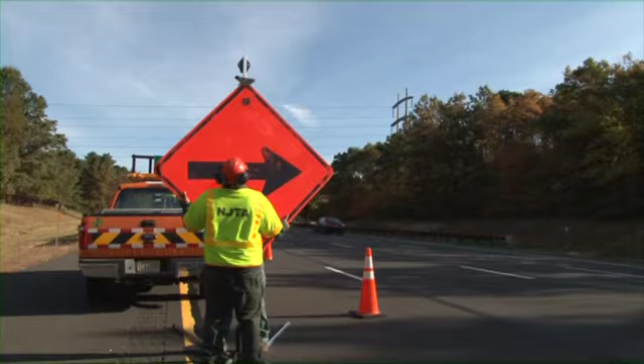It takes a colossal effort to keep one of the busiest roads in the country operational without putting anyone in harm's way. This is why the New Jersey Turnpike Authority has created an aggressive safety program aimed at keeping you and the traveling public safe. You will be required to understand and adhere to all of the requirements to perform your tasks in as safe a manner as possible. The New Jersey Turnpike Authority is comprised of several different organizations that all work together.

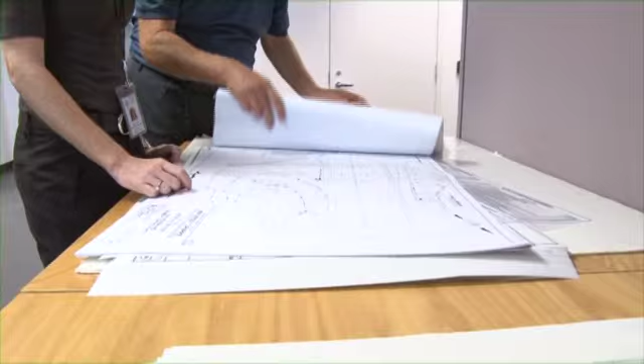The Engineering Department supervises and controls design, construction, and rehabilitation, as well as ensures the engineering standards are upheld throughout construction. The Maintenance Department is responsible for maintaining the assets of the authority, including the bridges and roadways, and they perform and manage all repairs and improvements.

The Operations Department is responsible for traffic engineering and regulations, emergency services, and coordination of roadway activities, as well as operation of the Traffic Management Center. They ensure that everything is operated with the safety of all motorists and workers first and foremost. The Operations Department is also responsible for the approval of all closings on authority roadways.

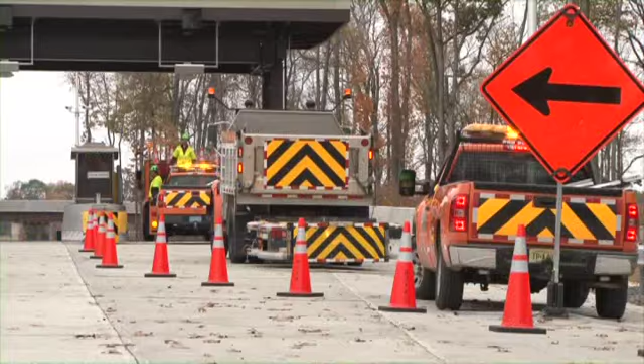The Tolls Department collects all of the tolls on the Turnpike and Parkway. Work zones in the vicinity of the toll plazas need to be coordinated with this department. Finally, the State Police, specifically Troop D, works with the authority to provide assistance with lane closings, vehicle escorts, and slowdowns. The Construction Unit Patrol specializes in temporary traffic control. Their primary duty while on site is to help you work safely.

Permits and approvals. Before any work can be done, you must ensure the correct paperwork is in place. This means proper permits and insurance for you and your company. Remember, traffic permits require 10 business days for review and approval from the authority, so if you do not have them, you are not working today. Failure to update the traffic permit as required will result in the suspension of the permit and denial of closure requests until the information is received.

All applicants for traffic permits will be required to view a training video regarding safe operations on authority roadways and must read and understand the Manual for Traffic Control in Work Zones. A TCC, or Traffic Control Coordinator, certified by Rutgers CAIT LTAP, may be required depending on the scope of the project. This person is to have no other duties for the project and is to remain on site at all times. The TCC is responsible for making sure all MPT is in place and working properly.

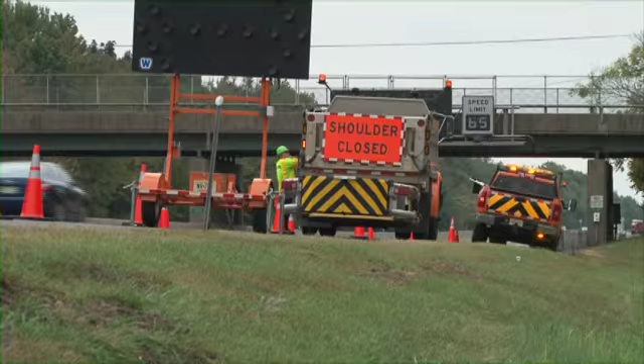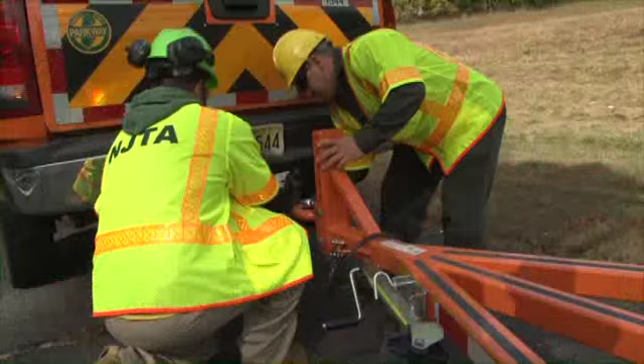Personnel and personal safety. Once on site, you must be sure to have proper personal protection equipment, or PPE. The New Jersey Turnpike Authority has high visibility safety apparel requirements that are above the minimum federal requirements. All workers that are exposed to traffic must wear a Class 3 ANSI reflective vest with sleeves. Tearaway sleeves are acceptable, and you should wear a hard hat and have proper foot protection when in a work zone. In addition, all vehicles should have overhead 360-degree visibility amber lights. Compliance with these OSHA regulations will reduce your exposure to hazards while on the job site.

Closure requests. The policy of the authority is to limit lane and shoulder closures to the minimum required to perform the necessary work in a safe and timely manner. Lane closures are only to be permitted when it enables work that would not be feasible or efficient otherwise. Only the Operations Department may approve the scheduling of a lane, shoulder, ramp, or roadway closure.

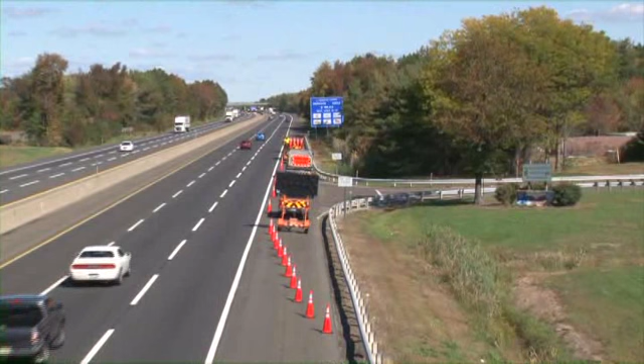Available times and dates for closure requests can be found in the lane closing and shoulder closing tables in the Manual for Traffic Control in Work Zones. These tables provide the minimum number of lanes that must be maintained for segments of the roadways on an hourly basis. Additionally, there may be some restrictions that apply to your specific closure, such as heavy travel days, special events, and weather issues. Check with the Operations Department about such restrictions, as they must approve any exceptions you may have.

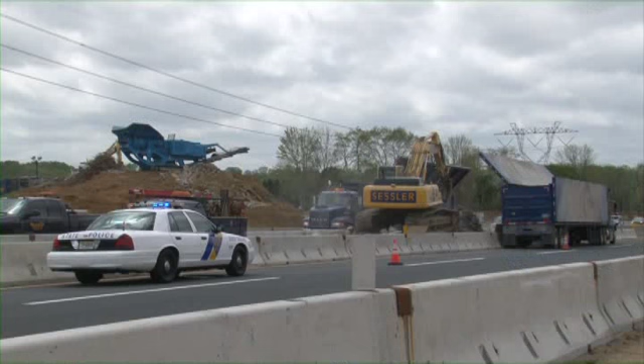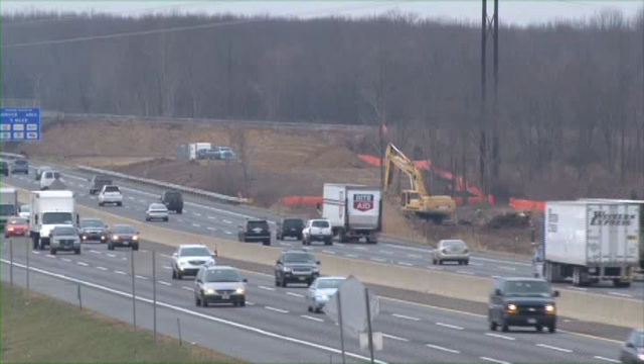Terminology. While working on the roadways and communicating with the state police and other groups, knowledge of the proper terminology and roadway designations are important. All designations on the turnpike are noted as from-to. For example, a roadway going from north to south would be abbreviated NS. Familiarize yourself with these abbreviations so that everybody can more easily communicate.

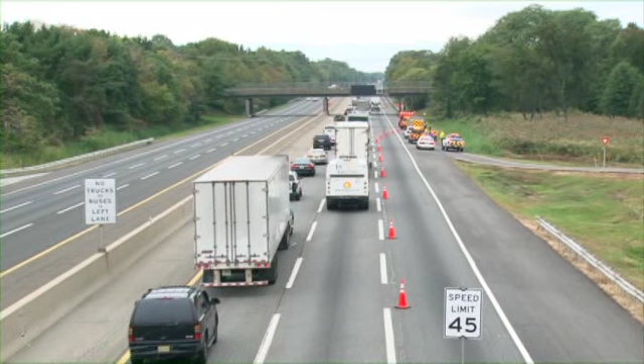Closures. There are several different types of closures that you could work on, each with their own specifications and restrictions. Lane closures refer to mainline roadways and are the most heavily traveled section that would need to be closed.

Short-term lane closures should only occur on the left or right side of the highway. The installation or removal of any type of lane closure on the turnpike needs to be performed with the assistance of the state police using a traffic slowdown. Lane closures on the parkway do not require the use of a slowdown.

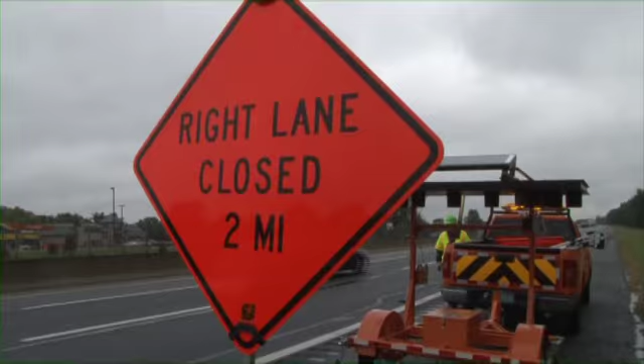To begin a lane closure, proper signage must first be put up to alert traffic of the approaching work zone. Both sides of the roadway must be signed before work can begin. Speed reductions are to be posted in advance of and through a work zone and are to be set at 45 miles per hour unless otherwise noted.

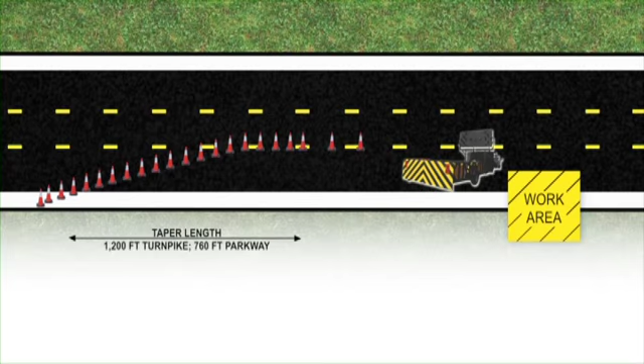Then, with the use of a turnpike-approved cone truck backed up by an attenuator, the cone taper can be set up. The taper on the turnpike is 1,200 feet long, measured from the first cone of the taper, and 760 feet on the parkway. The cones must be placed down 50 feet apart on the turnpike and 20 feet apart on the parkway within the taper.

An arrow board must then be placed in its proper location 900 feet from the first cone located within the taper on the turnpike and 760 feet from the first cone at the end of the taper on the parkway.

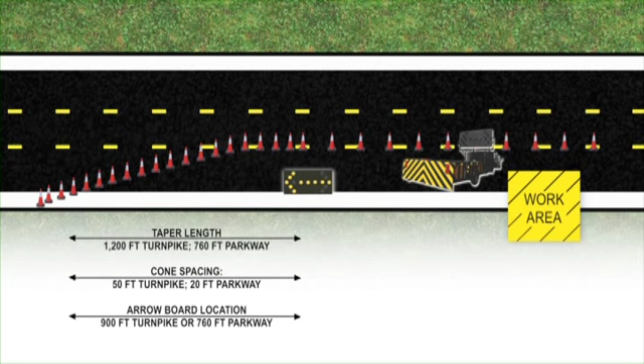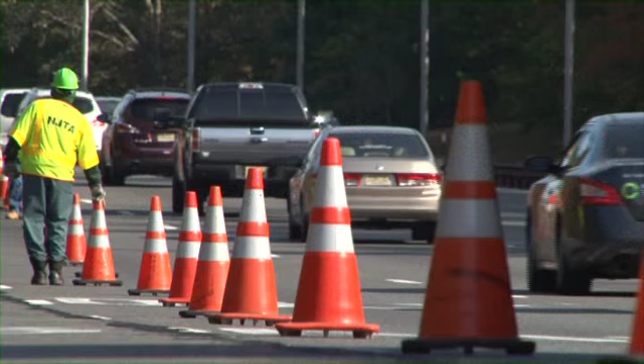When multiple lanes are closed in a work zone, they need to always be adjacent on the same side of the highway and will require a minimum of a 1,000-foot tangent section, depending on sight lines and approved taper points, followed by 1,200 feet of taper on the turnpike and 760 feet of taper on the parkway. Spacing of cones on the non-tapered section is 75 feet on the turnpike and 80 feet on the parkway.

After work is completed, all cones must then be picked up. On the turnpike, a slowdown must be initiated by the state police before the pickup of the taper can begin. The cone truck shall travel in reverse, always on the inside of the taper, picking up the cones. Never leave a lane closed during inclement weather.

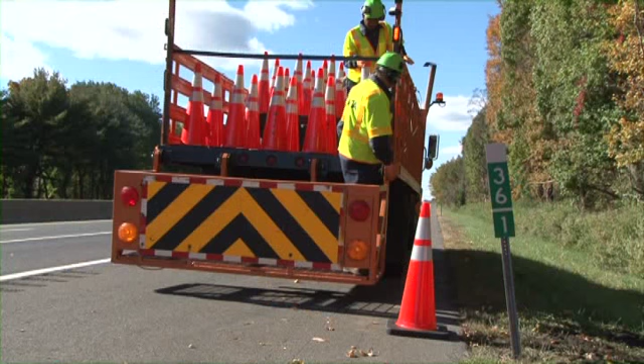Work areas within the clear zone, typically 30 feet, of an authority roadway require a shoulder closure unless protected by guide rail or temporary construction barrier. The installation or removal of any type of shoulder closure may be performed without a traffic slowdown and without the assistance of the state police.

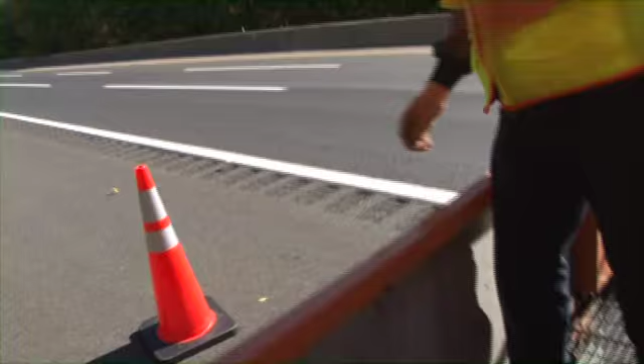Remember, with or without the support provided by the state police, it is still your responsibility to close or reopen lanes and shoulders in a safe manner for workers and the traveling public. Closures at toll plazas will require state police assistance unless otherwise advised by the Operations Department.

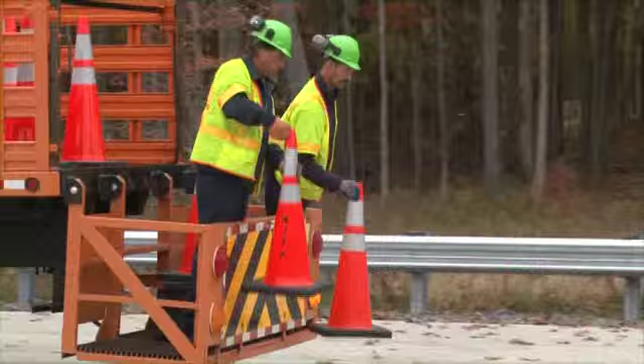Before work begins, the lane use signal above the lane must be changed to indicate that the lane is closed. Closure of toll plaza lanes may extend before or after the toll plaza or may be confined to the limits of the toll plaza, depending on the type of work being performed. Interior toll plaza lanes may be closed while maintaining traffic through the toll plaza on either side. Unless otherwise shown in the plans, the standards for toll plaza closures are the same as for other lane closures.

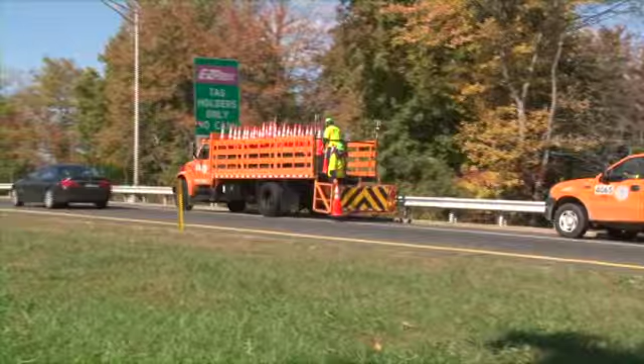Closures on ramps that do not extend onto the main line will follow their own set of guidelines. For short-term ramp closures, the Operations Department will issue the permissible closure hours. Full ramp closures will typically require detours. You will be responsible for coordinating with the authority and any other affected agency in developing any required detour plan or traffic mitigation requirement.

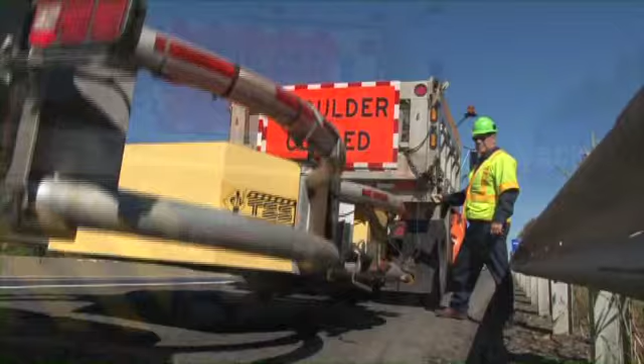Short-duration shoulder closures may be used instead of standard shoulder closures only when and where authorized by the Director of Operations. Roadway closures are provided on a limited basis for contract work and noted in the contract plans and specifications, and are otherwise rarely permitted. The Operations Department will advise you when work may be performed within a full roadway closure.

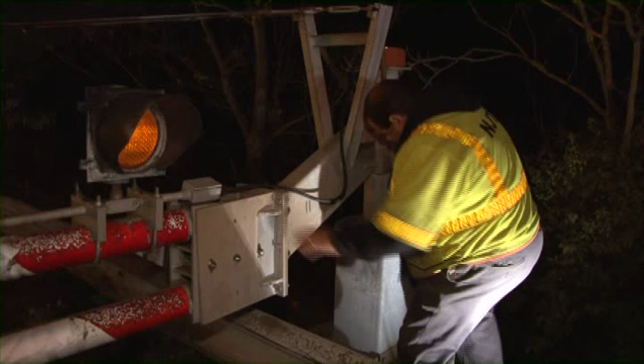Once a roadway is closed, the gate is to remain locked, and the roadway can only be reopened by the State Police or the Operations Department. When working within a closed roadway, work vehicles may travel in both directions as long as you stay to the far right in the direction you are heading. Headlights and 360-degree visibility lights must be on at all times.

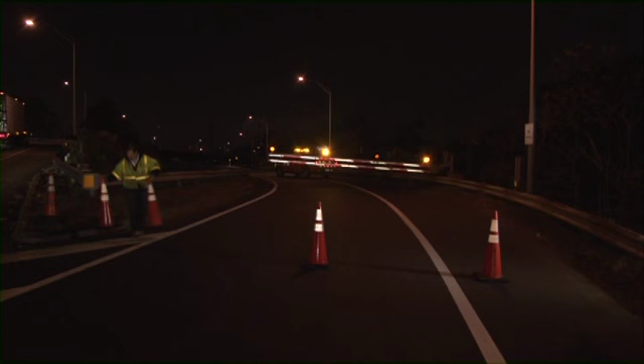The maximum speed limit on a closed roadway is 35 miles per hour, and all access to the site must be from an interchange unless approved by the Operations Department or State Police. U-turns cannot be used to access a closed road.

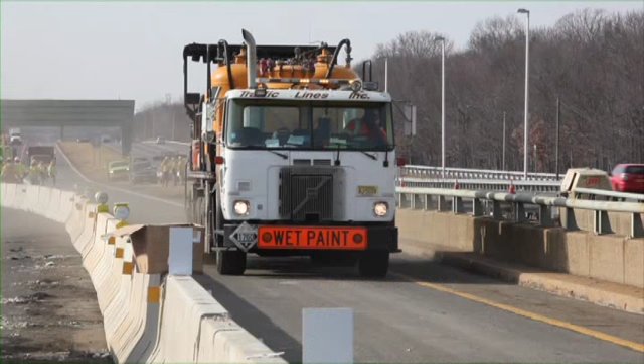Sometimes lane shifts will be required to keep traffic moving safely away from a work zone. Note that a lane shift is not a lane closure. Some lane shifts may require the removal of existing striping, and temporary pavement markings will be needed to indicate that traffic must temporarily follow a different path from the usual lanes. Tapers are 100-to-1 on the approach and 70-to-1 on the return, unless otherwise noted.

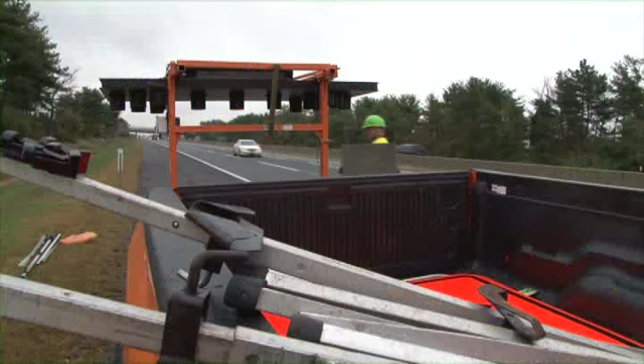Temporary traffic control devices. In order to safely close any lanes or shoulders, temporary traffic control devices will need to be installed and maintained. Temporary work zone signs will need to be placed as depicted in the plans or standard drawings to maintain the safe and efficient flow of traffic through the work zone.

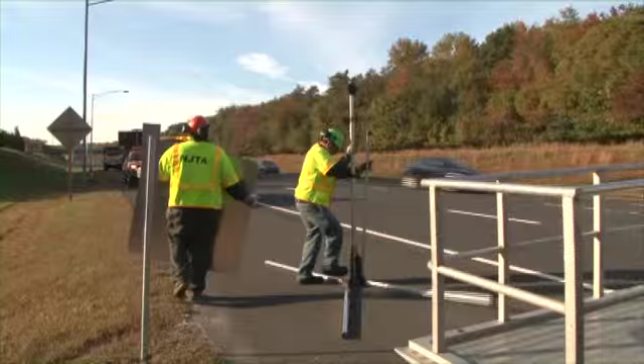All temporary signs need to be on folding, barrier-mounted or guide rail-mounted stands and must meet the standards described in the authority documents. Portable variable message signs are used to alert traffic of upcoming work zones and closures. These signs shall be compatible with the software used by the statewide Traffic Management Center so that they can be monitored and controlled. Access procedures to these boards shall be provided to the Operations Department 2 weeks prior to their activation.

Vehicle-mounted arrow boards used with truck-mounted attenuators need to be activated to point in the appropriate direction that traffic must shift to pass the vehicle on the parkway.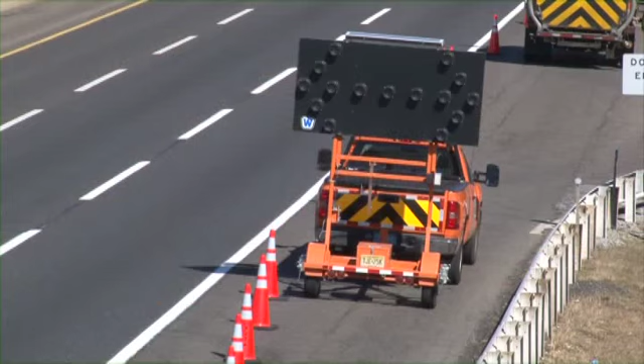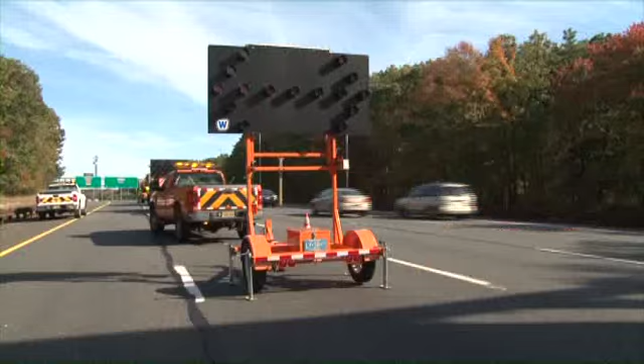On the turnpike, the arrow board attached to the vehicle will be in caution mode straight bar. Work zone arrow boards that are not vehicle-mounted must be located either behind barrier or guide rail or within an approved lane or shoulder closure. Trailer-mounted arrow boards must not be hitched to a vehicle while in position for the duration of the closure.

Traffic cones are used to channel the traffic away from the work zone and are typically placed on the closed side of the dashed or solid traffic line. These cones must always be reflective orange and outline the safe work zone, and no encroachment whatsoever will be permitted into the adjacent open travel lane.

There are 28-inch cones and 36-inch cones that may be used. If using the 28-inch cones on the turnpike, a 5-pound collar must be placed on each one to ensure that the wind doesn't lift them up. All cones must be uniform on a work site. Never mix and match different sizes of cones.

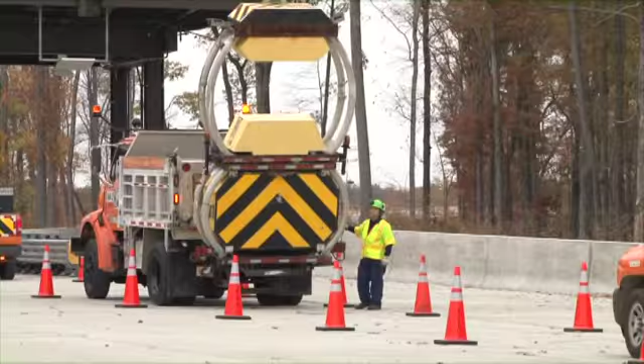A truck-mounted attenuator, or TMA, is a system that is installed on the back of the traffic control truck and is the rearmost vehicle in a mobile lane closure or other truck in advance of a lane or shoulder closure and provides safety for the workers on site. This TMA is 22,000 pounds and should be set up before the beginning of a work zone as specified by the authority documents. No work can be done on either roadway without a proper TMA in place.

Working during the night can pose some additional safety concerns, so extra regulations must be followed. Signs, cones, and other traffic control devices should have sufficient retroreflectorization to be seen at night, and all work vehicles must have 360-degree visibility lights. All work activities must be adequately illuminated, and the lights need to be positioned so as not to be directed into oncoming traffic. Work zone lights are not a substitute for any warning lights.

Worksite access. When entering or leaving a work area, appropriate caution must be used. Anytime you enter or exit a job site, ensure that there is a sufficient gap in traffic to allow for the intended move. It is also important to understand that under no circumstance are you allowed to enter or cross an active roadway, and you can only enter or leave the work site in an appropriate work vehicle.

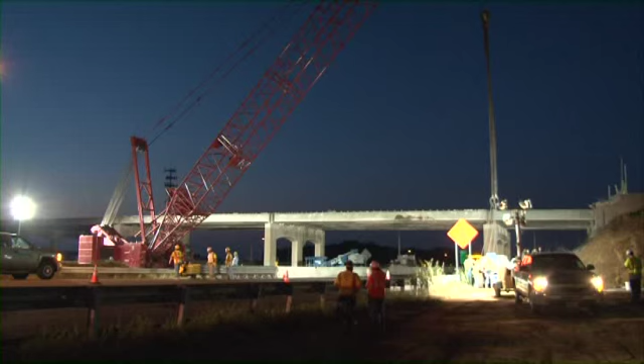Maintaining temporary traffic control zones. Lane, ramp, and partial ramp closures require a full-time patrol unless otherwise determined by the operations department. Patrol vehicles are considered work area vehicles and must follow all restrictions as such. When patrolling lane closures, the patrol must work from within the work zone and obey a speed limit of 35 miles per hour. If traffic cones are knocked down on the taper section of the turnpike, a slowdown must be requested in order to go out and set them back up again. The TCC and resident engineer will be responsible for maintaining the traffic control throughout the work zone.

Special provisions. While working on the parkway, the use of U-turns is generally prohibited, although may be allowed depending on the contract. Use of grade-separated U-turns may also be allowed on the turnpike depending on the contract. At-grade U-turns are prohibited on the turnpike as well as all U-turns at toll plazas. Z-turn usage is never allowed under any circumstance. If you need to get back onto an active roadway, you need to safely exit the work zone, get off at the next interchange, and then properly re-enter the highway.

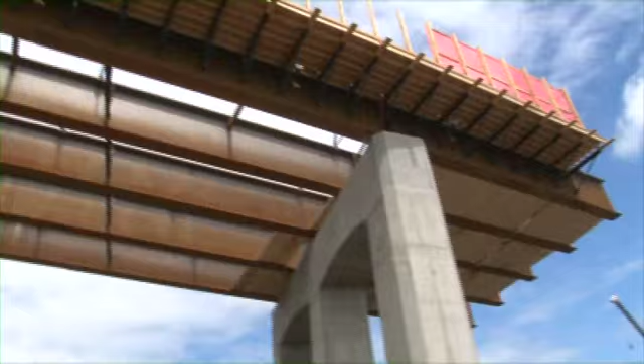Communications. When necessary, lane closings may need to be coordinated with other agencies. If work zones fall outside of authority jurisdiction, you must comply with regulations applicable to those areas. The Traffic Management and Technology Center is the focal point for all communications and disseminating of information to all parties, both internal and outside agencies.

Named after John A. Cifelli, the former director of maintenance, this building is also where they monitor and report congestion incidents. Traffic impacts and incidents are everybody's responsibility. So if you see something, call the TMC and report it. Refer to the Construction Incident Communication Plan to obtain a list of emergency contacts and protocols on how to report such incidents.

With the help of the Turnpike Operations, Maintenance, and Engineering Departments, the State Police, and you, we can all work together to build and maintain safe roadways. Remember that communication is important, and safety is always the #1 priority.